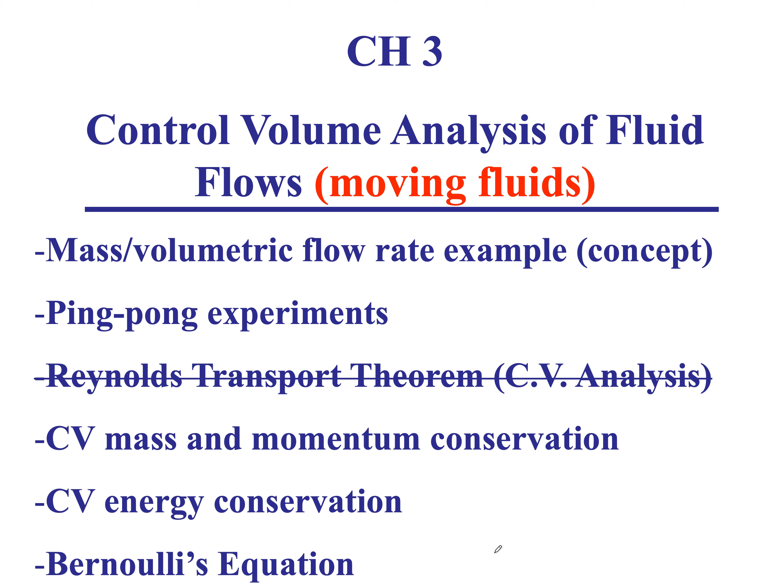For us to be able to understand these moving systems, we want now to consider their momentum conservation, their mass conservation, and their energy conservation. So these are the basic principles that we want to cover in this chapter number 3, which are the basic principles that we believe to be true, and there's sufficient evidence that these principles are true, which is the conservation of mass.

Mass is not destroyed nor created. Energy is not destroyed or created, but you can transform it from one form to another. And linear momentum conservation, that is, you need a force to change the direction or the velocity of an object of mass m, or force equals mass times acceleration.

The objective of this course: so we know all these principles, they aren't new to us, they're familiar principles, but what we will be doing over the coming lectures is to be able to mathematically express and write these 3 principles for a flowing system.

And for that, we will revert to the control volume concept that we have seen in thermodynamics, which defines a system as a set of inlets and outlets and some other boundaries. So a control volume is a system that has boundaries, and mass crosses those boundaries, and with the crossing of the boundaries, that mass carries with it momentum and energy, so energy crosses that boundary.

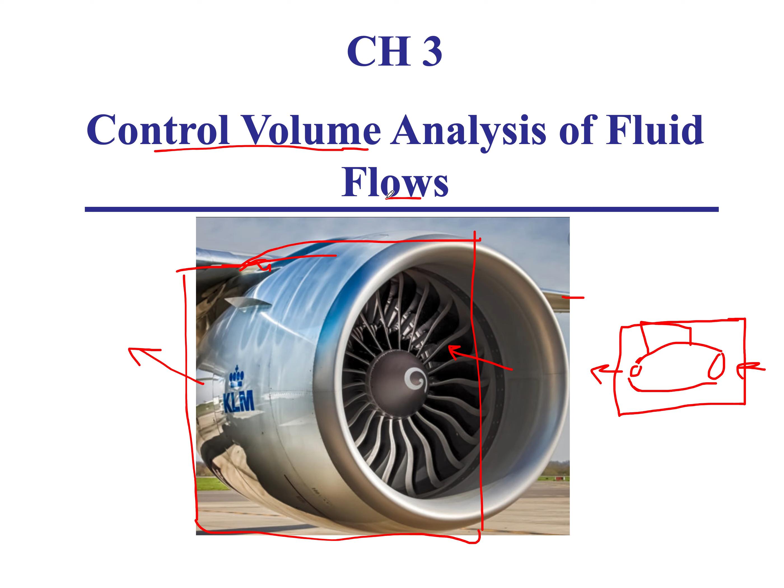And for that, I'm using this YouTube video. The reason why I picked this video is that they use an advanced flow visualization technique called Schlieren visualization, which lets you see small, minute variations in the density of the air using a set of lenses and lighting and mirrors.

So let's watch this. So this is the field of view which a Schlieren system sees. So when I play this, you will see that the natural air... Oops.

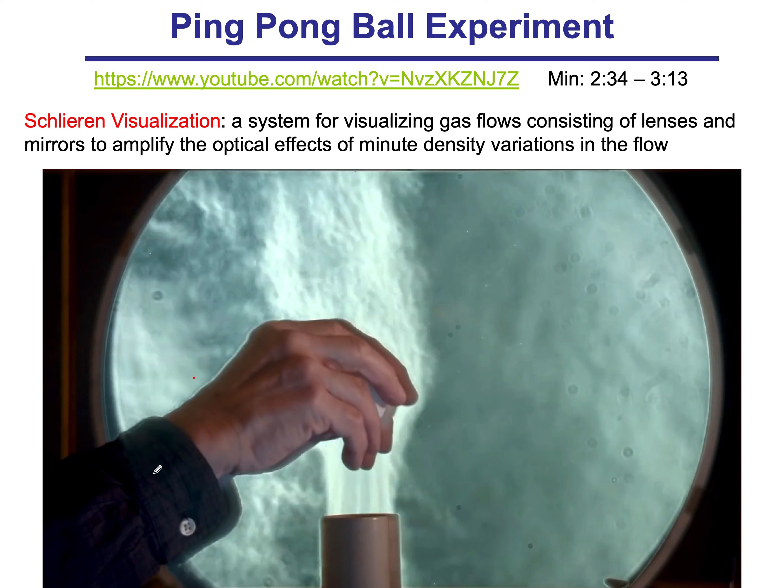Okay, never mind. Let's watch this video. So you have a ping pong ball suspended in an airstream. And you can do this actually at home, and we can see the white stuff is the variations in the density of the air due to its velocity. So we can tilt the hair dryer and the ping pong ball stays suspended, and so on and so forth.

Okay, so what we saw is the Schlieren effect allows us to see the variations in density in the fluid through the light effect, through the index of refraction variation. And what we've just seen was a hairdryer that ejects a stream of air, and a ping pong ball got suspended. So what we can conclude from this picture, what we can observe in this picture, is that there was an airstream.

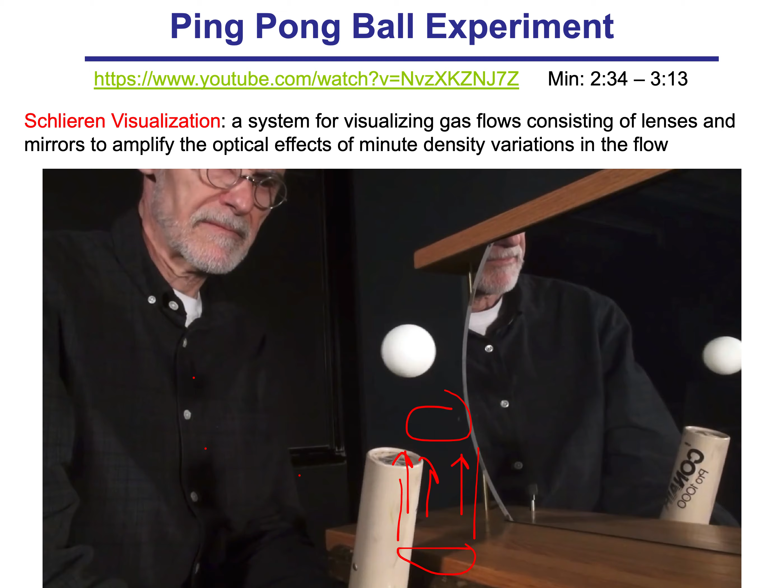So there was an airstream, and that airstream had a velocity. And that velocity was able to create a force. And how did we observe that force? By seeing that this ping pong ball is being suspended in the airstream. We're looking at the same thing except in two different lightings. That's what you would see with your eye before, and here's what you would see under a Schlieren system visualization. So we're seeing the airstream. That's what's nice about this experiment.

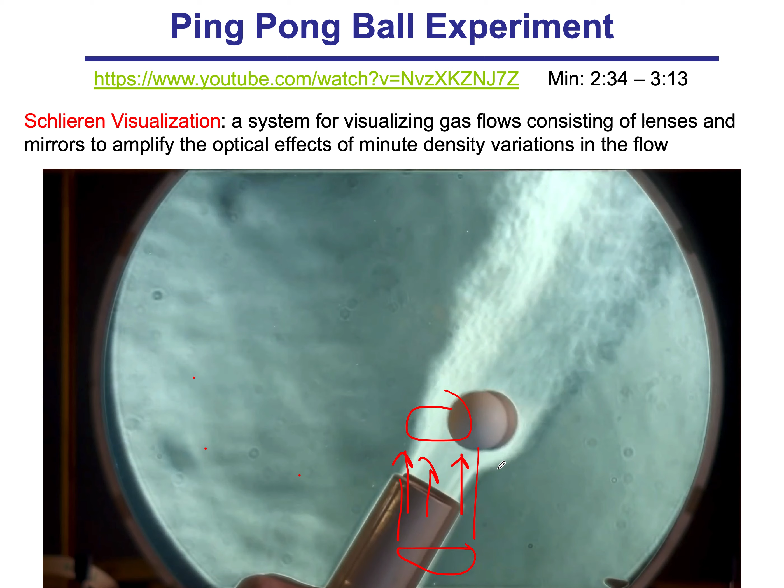So if you look at two snapshots of the demonstration that we have just shown a minute ago, you'll see the case where the ball is vertically suspended, but also you could see the case where the airstream is tilted. And let's see what we can notice over here.

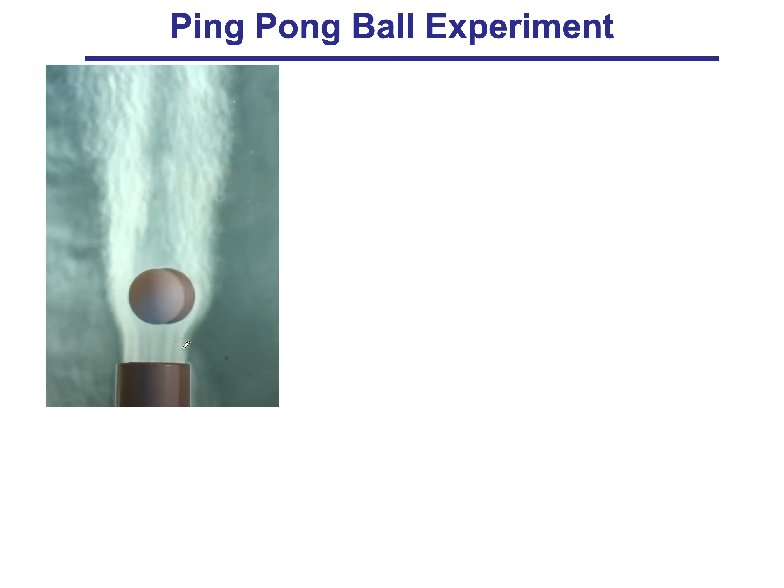The first thing that we can notice in the case of a vertically suspended ball, the airstream is going vertical, is that if I were to draw a control volume over here around the ball, you will see that the width of the airstream at the inlet is actually less than what it is at the outlet. So that's our first observation. We see that the air deflects around the ball, which we'd expect because the ball takes space, so we need space for the ball and the airstream at the same time.

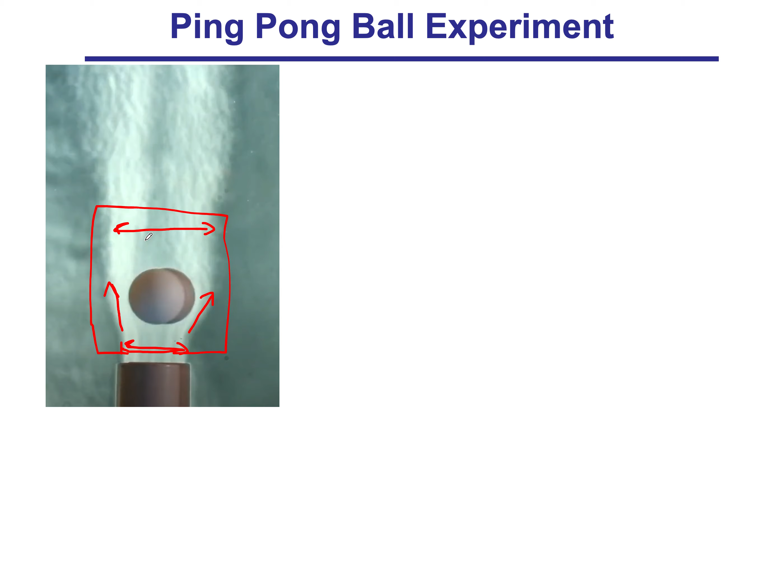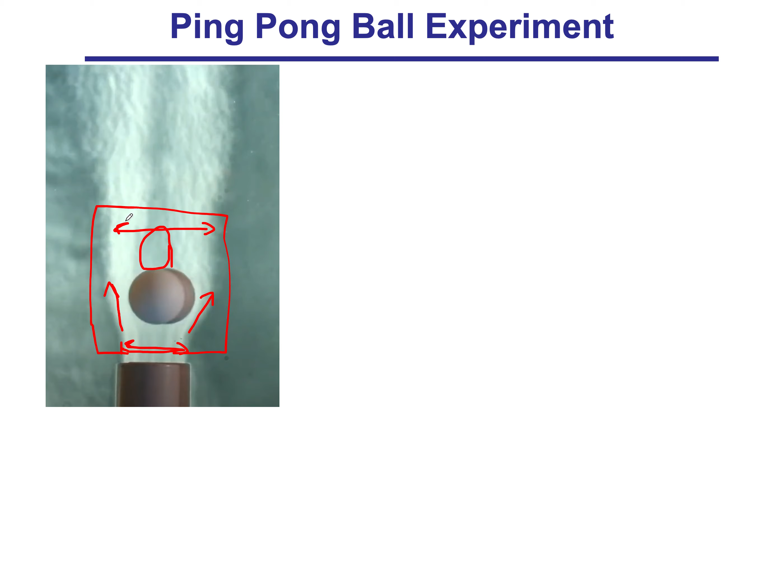And what you'd see here, you want to think of the bright light to be faster fluid, and the darker, shadowier region right here to be slower fluid. What you'd notice is that there is sort of symmetric flow left and right of the ball. But the important thing to notice also is that the width of the airstream that comes into the control volume is actually smaller than what leaves, and this has implications on the force generated on the ball.

So these are the type of things we will be considering in our study: when we take control volumes, it will help us understand what is happening in the flow field. So now we're mentioning a flow field, so let's come to that in a second. And what are the forces generated in that flow field? So now we came up with the word flow field, which means that we have a field of airflow, and there is at each point x, y, and z.

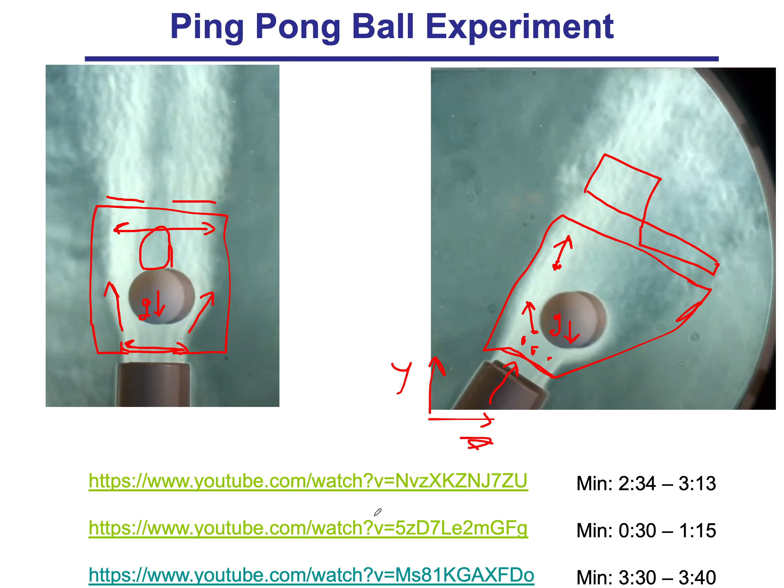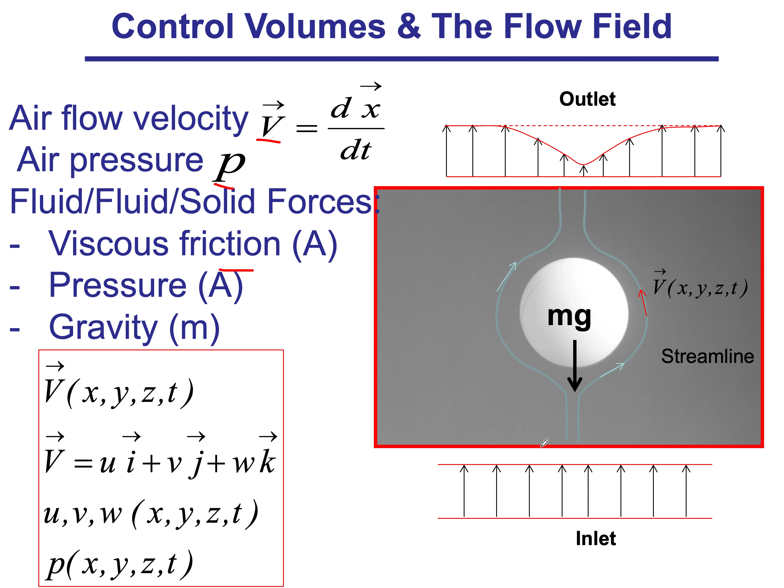And when I do that, the type of analysis that I will do is going to be completely different than the previous example, where I picked my control volume to be far, not to touch the ball, and to be sufficiently far away from the solid object here. But now that I have the control volume hugging the surface of the ball, my analysis is going to be

completely different, because if I look at what forces are acting on the surface of the ball, one is definitely going to be pressure, but at the same time we're going to have friction, which is parallel. So I'm going to get a shear stress and a normal stress, which I'm going to call pressure, and here I have a shear. And the pressure around the ball is going to be different depending on its angular position, as well as the shear stress.

But the net of that, if I integrate over the whole surface of the ball, I'm going to get the force due to the shear stress, and the force due to the pressure field. Now that we are talking about this particular control volume, I want to use it as an entry point to introduce the no-slip condition.

If I look at any fluid particle that's touching the surface of the ball and try to measure its velocity, I'm going to notice that it's 0. This has been shown through empirical experiments. There's a lot of empirical evidence showing that a fluid particle directly in touch with a solid object, such as the surface of this ping pong ball, is going to have 0 velocity. And that's what we call the no-slip condition.

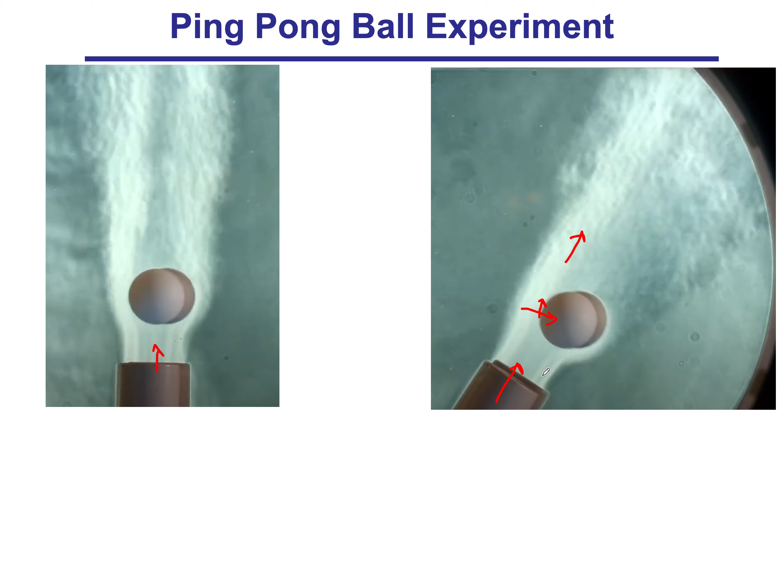So the reason we need to do control volume analysis is that it helps us answer questions like this. And control volume analysis, as we said, is a black box analysis. All I need to know is what's happening at the boundaries, and that will tell me a lot about what's happening inside the control volume. So all I need to know is what's happening at the outlet here and at the inlet.

And this is what's happening at the inlet. You have a very fast flow, concentrated and thin, and here you have a slow flow and a slightly faster flow in this region. We will come to this later on. But as we said, a force is generated because the air has momentum. It has lost some of its momentum to the ball, and it's left with less momentum.

But that air also has a mass, and this is continual. It's not the same air that comes in; every moment I have a fresh mass of air that comes in and leaves. So that is the first order of analysis: I want to know how much of that air is coming into the boundary of my control volume.

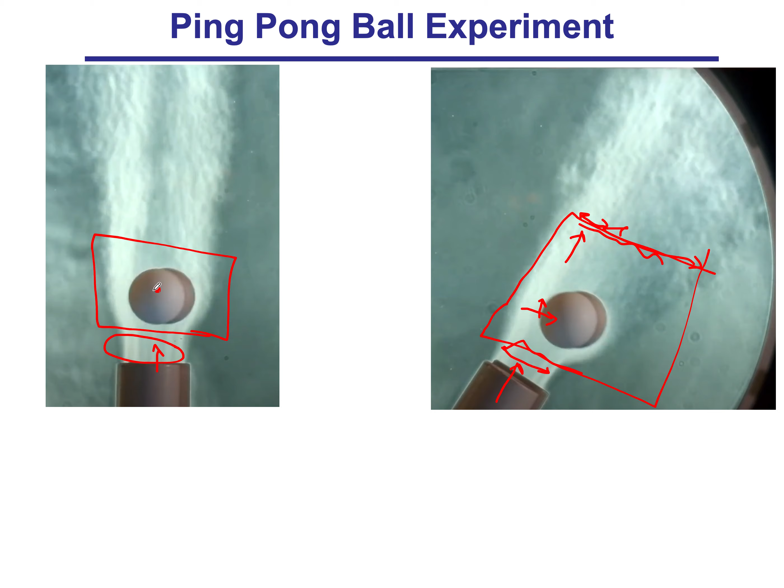If I'm able to quantify that, then I could move on to more complex analyses, such as what is the maximum weight of the ball that I can suspend in this jet stream. So our first order of business is to try and understand how much mass is being carried, is entering my control volume right over here.

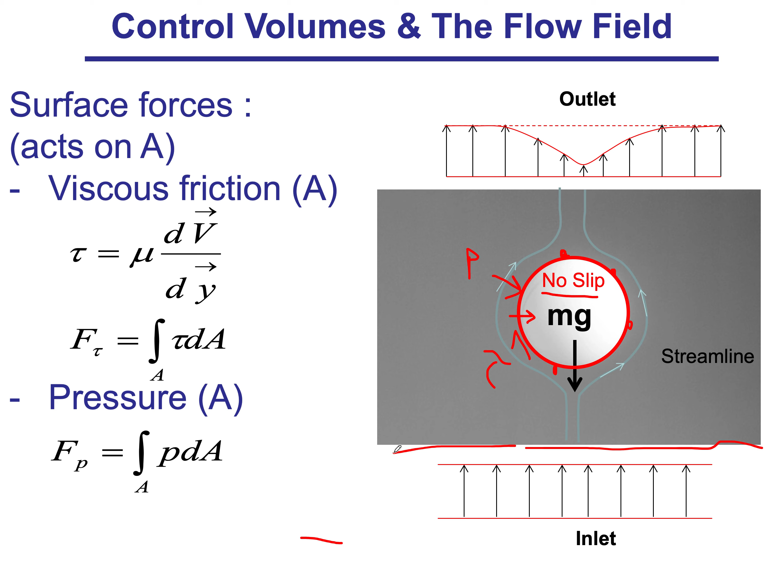So for that, let's go to the beach, and let's do a simple experiment on the beach, which is to scoop sand. So you're on the beach, you have a cup or you have a shovel, and you're scooping sand from the beach into the bucket. And the question is, can you fill the bucket in 1 minute? Are you going to fill the bucket in 1 minute or in 10 minutes? It depends on how fast you scoop and how much mass flow rate goes from the beach sand into the bucket.

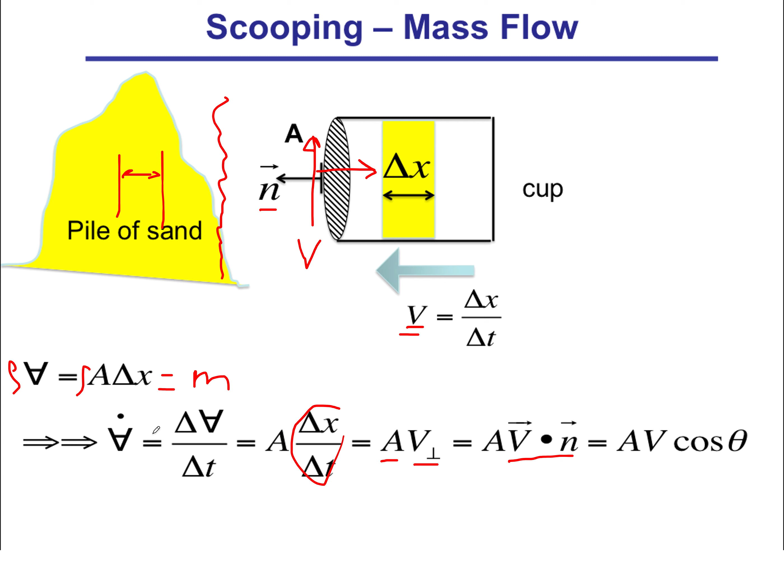So that is our volumetric flow rate. But now imagine I want to get mass. Mass is just the density times volume, so that gives me a mass. And if I want a mass flow rate, I just divide by time. So it's the same story, and all you need to do is just multiply by the density. Multiply the volumetric flow rate by density, you get the mass flow rate, and this would be the relationship we'll be using in this course for the mass flow rate.

Now let's look at other cases. Imagine now other theoretical cases. Imagine now that the pile of sand is going towards you at a velocity v, and you're also scooping in the direction of the pile of sand at the velocity v. The rate at which sand gets into your cup is actually 2v.

So this is the case where if you have a river and you have a flow in the river of velocity v, and you have a cup, if you let it just sit there, it will fill at a rate of velocity v. That's how much mass flow rate is going to get into your cup. But imagine now that you're scooping your cup at a velocity v upwards, or some other velocity, then it's the relative velocity between them. And since they're in opposite directions, that will sum up.

Now, the last point I want to make over here is that this cup is just to help our imagination. But now imagine the whole story without the cup. All you care about is this area. So really, you'll see in this formula right over here, there is no cup. There is only a cross-sectional area where fluxes go through, and we have the normal velocity of that cross-sectional area.

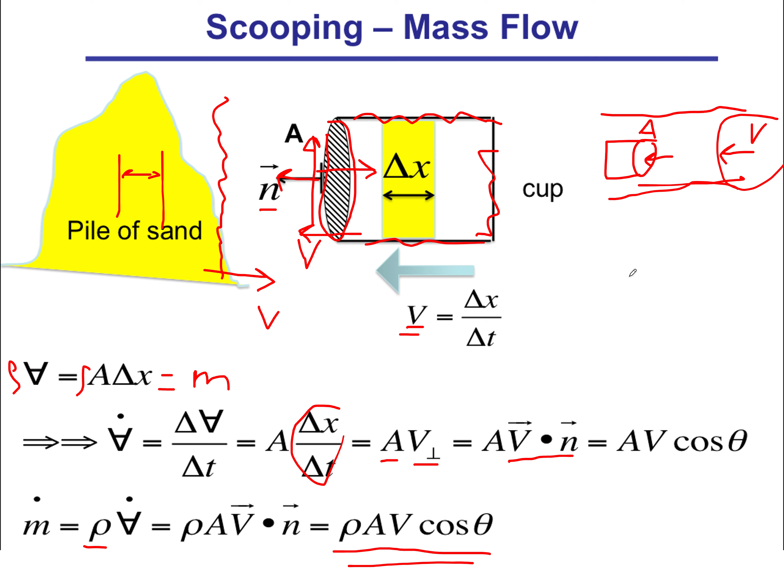So now relative velocity. The next thing we went into is when the fluid itself is moving, so the pile of sand is moving or the river is moving, and my area A, which is part of my boundary, is itself moving. Then I get what's called the relative velocity. And relative velocity is actually very important. The relative velocity is just the difference in velocity between the fluid and the boundary, the boundary represented by the area A.

So we still have the dot product, and now we just want to make sure it's the relative velocity between the two. And the relative velocity is the vectorial velocity. This comes into manifestation in aerodynamics quite a bit. For instance, if you fly from Paris to New York, heading west, it's actually going to take you longer than to fly east, such as from New York to Paris. The reason is because the air in which the airplane is suspended has a direction of motion. We will explain this a little bit more in the coming slides.

But I want to point you to this link over here, or you can just Google it. British Airways set a record crossing of the Atlantic in less than 5 hours. That was on February 9, 2020. They keep breaking these records. And the reason is they had a tailwind. So let's talk about that in a second.

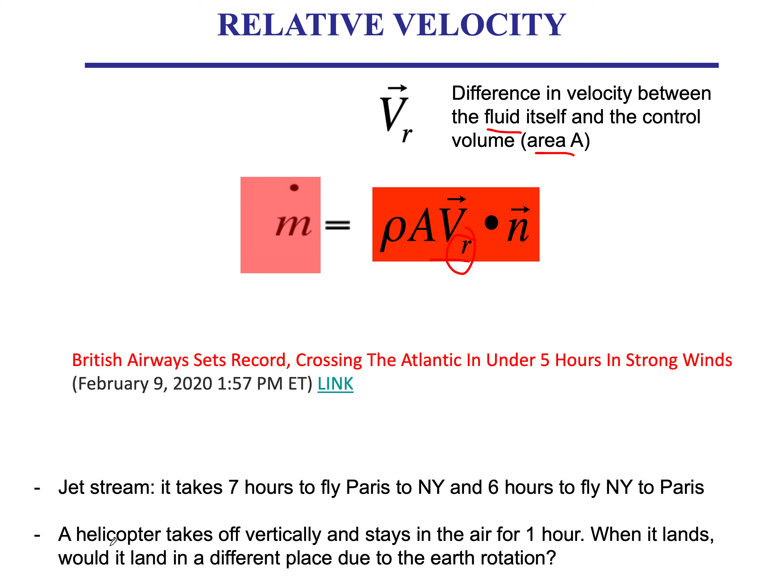Okay, so let's look at the relative wind speed. Remember we had the scooping with a cup from the river. The river had a velocity, the cup had a velocity, and then we had the third velocity, the difference between them, which we call the relative velocity. So for an airplane flying from point A to point B, the velocity of the airplane, which you can consider as our cup, we're going to call the ground velocity, which is what you measure with GPS speed. If you're sitting on an airplane and you look at the monitor, that's the ground velocity you get there.

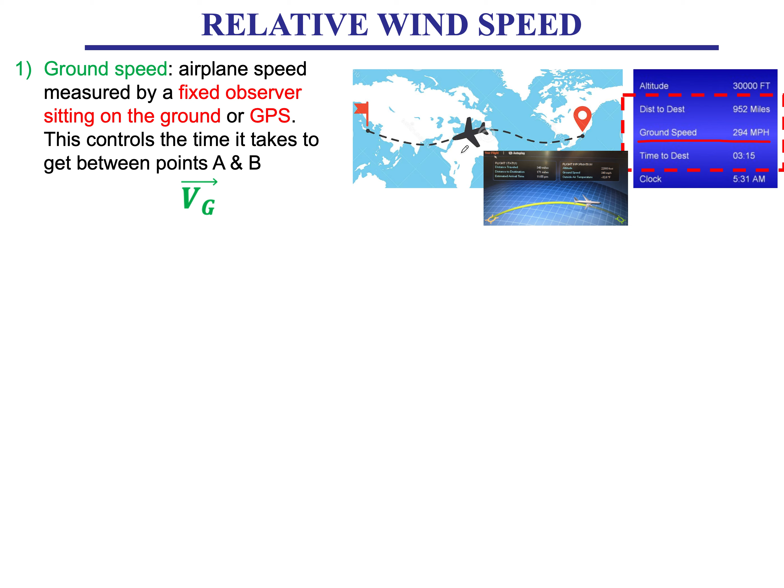It is the velocity observed: the velocity of the airplane, or the control volume, or that particular area we're interested in, the area of the engine, seen by a fixed observer on the ground. But let's say that same observer on the ground looks at the clouds around the airplane. They will notice that the clouds are also moving at a velocity. They could be moving in the same direction as the airplane, in the opposite direction, or in any other direction.

So that's the atmospheric wind speed. Let's call it VA, and that's typically measured by a ground weather station. And now, if I am sitting on the airplane, the engine and the other instruments on the airplane, such as the speed sensor, they don't care about the ground speed only, or the atmospheric wind speed only. They care about the relative velocity, because that's the velocity responsible for the mass flow rate going into the engines of the airplane.

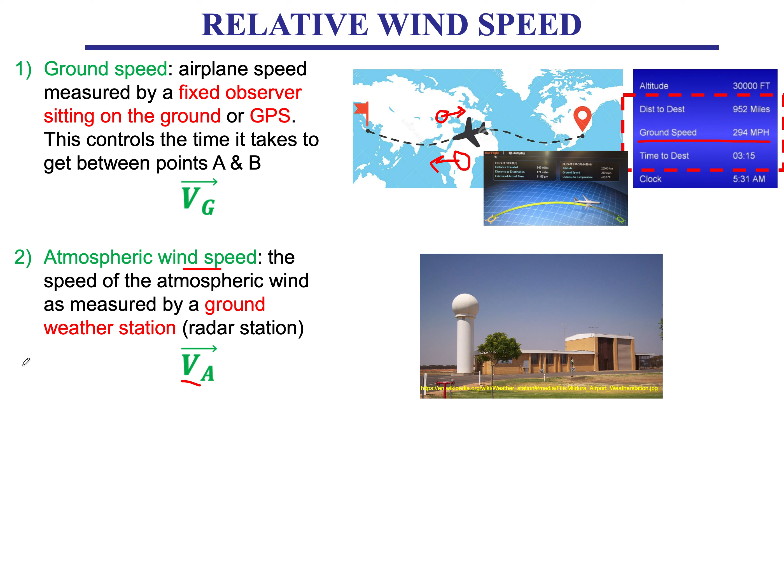So that, as well as the mass flow rate flowing over the wings, is what controls the amount of force that the wing generates. So it's an important velocity that we have to clarify a little bit more. So that's the relative velocity between the air and the airplane. And the relative velocity is the velocity of the wind seen by someone sitting on the airplane.

And really the way you measure this is you actually have someone or something sit on the airplane and measure the air velocity. So you have what's called the pitot tube, a velocity measurement device that measures the difference between VG and VA, which is the relative velocity, and directly gives it to you. And it looks like this. It's something that sticks out of the body of the aircraft and measures this relative velocity.

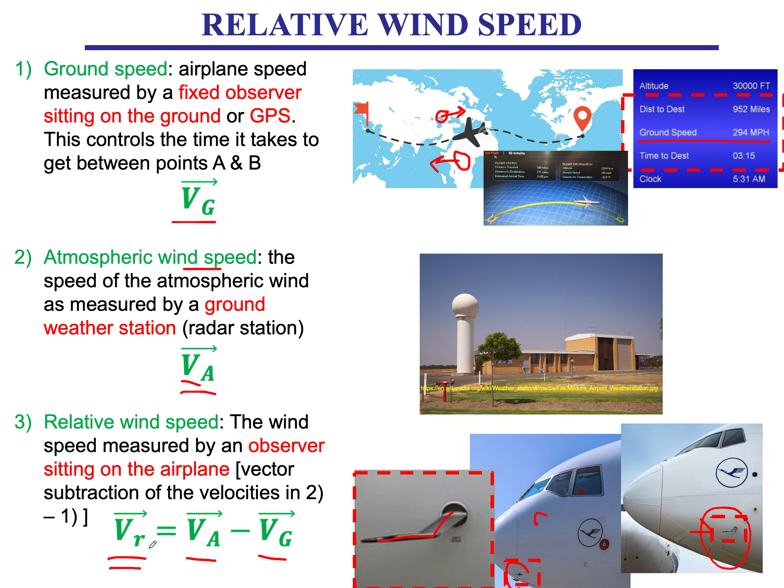And this is the relative velocity that we have seen before, that's responsible for the mass flow rate. And that mass flow rate, as it flows over the airplane, carries with it momentum and carries with it energy. So all the energetics, all the momentum conservation calculations will have to depend on this relative velocity.

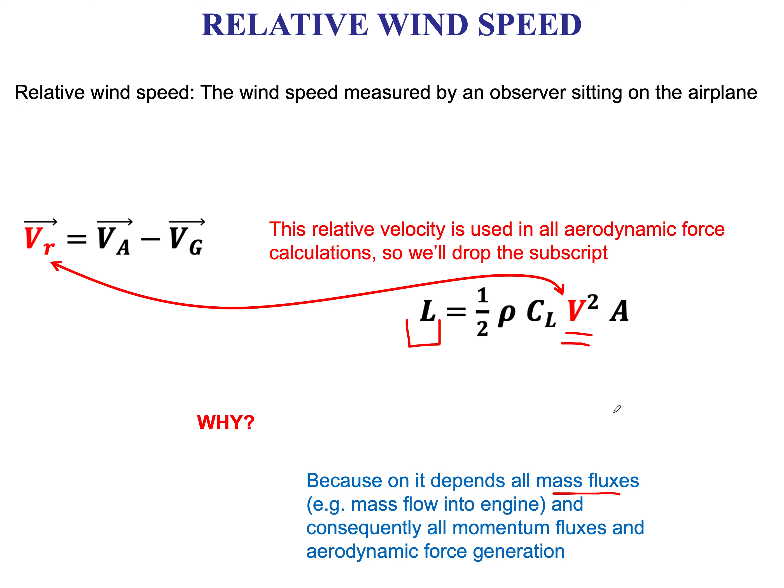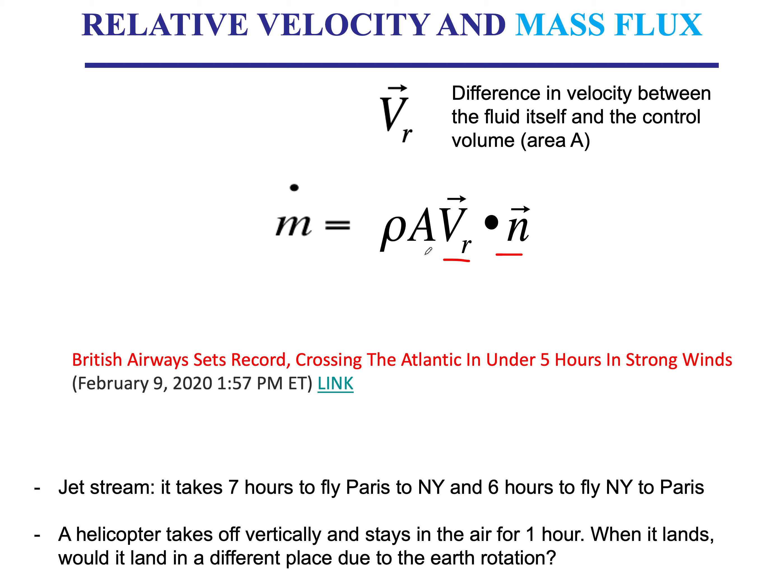Very well. And this is a slide from my aerodynamics course. So the relative velocity is what you actually use in all your aerodynamic calculations, such as the lift calculation and drag and so on. Again, it's because of the mass fluxes; the mass flow rate depends on the relative velocity, as in the previous slide, v relative dot n dA. And also the forces will depend on that. We'll come to this slide later on to explain what it is.

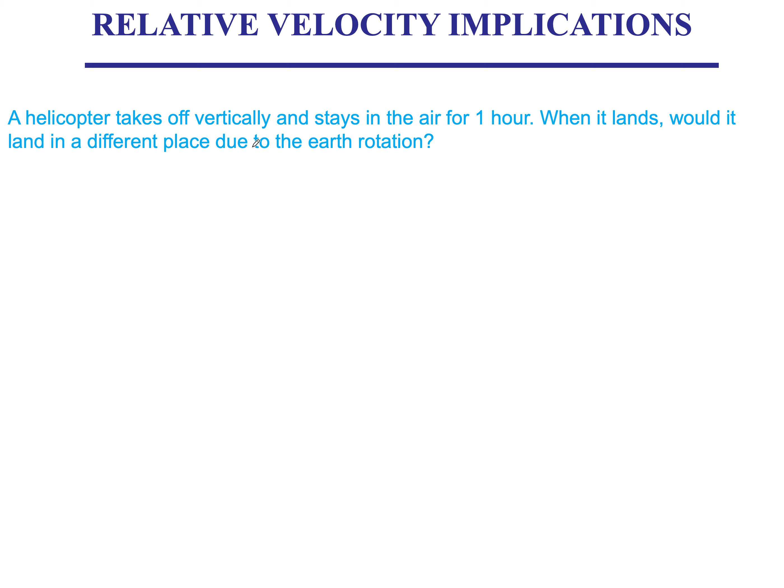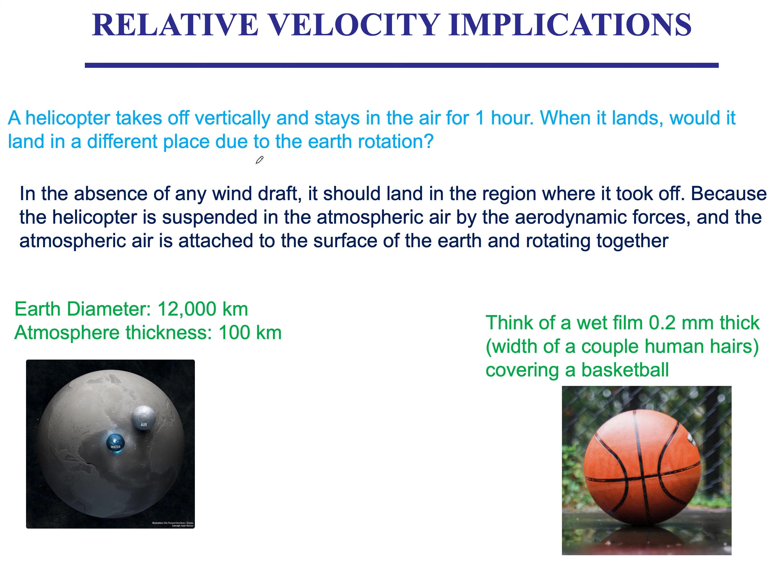So let's look at the relative velocity in a more practical fashion and application. So if you look at the monitor, you can see, right. So I think this answers the question: when you ride up in a helicopter and you stay an hour suspended in the air, are you going to land in the same place or in a different place? So I'll let you think about that, and I'm gonna skip over this.

So we're still talking about the relative velocity, and you're sitting on an airplane, and you'll see that there's the ground speed, which is the speed of the airplane seen by an observer sitting on the ground, which is the same as what the GPS system does. If you have a GPS system when you're riding on an airplane, you're going to get the same speed, what's called the ground speed. But also on the monitor you have what's called tailwind. Sometimes it says tailwind, sometimes it says headwind.

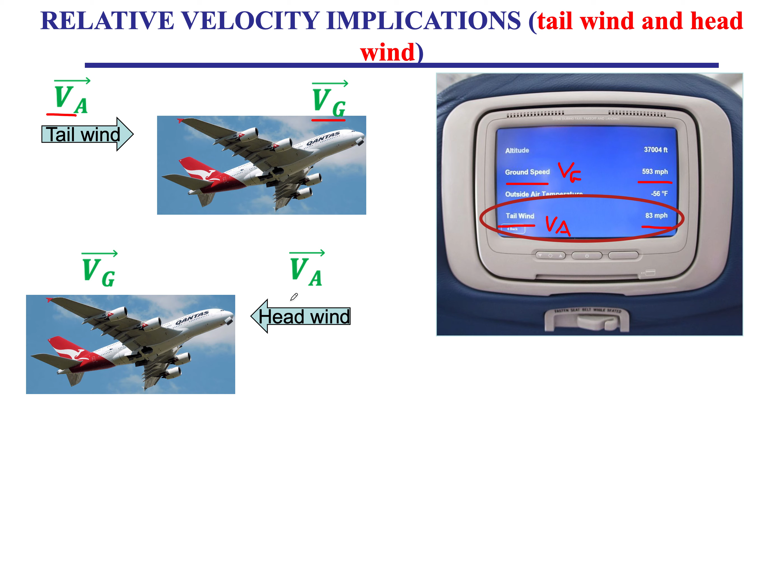So this is the VG, which we have seen two slides ago, and this is the VA as measured by a weather station, and the relative velocity is the difference between those two. So let's look at those two cases, a tailwind and a headwind. So here's my VG, the ground velocity, and this is the atmospheric air. If you're moving in the same direction, then they subtract. But if you have headwind, the relative velocity would be the summation of the magnitudes of the VG and VA.

So that's the reason why you get a difference in time and ground speed flying east or flying west. The reason is because you have a jet stream. So if you're heading towards the east, you're riding on this jet stream and you don't have to work as hard. But if you're heading west, you have to move relative to the ground, but also overcome the jet stream velocity.

But why? You may ask why. Well, let's take it from the point of view of the engine. So let's say the engine has to produce a certain amount of thrust force, and that thrust force depends on the mass flow rate that goes through the engine.

And the mass flow rate that goes through the engine just depends on the density, the relative velocity, and the opening area of the engine. So with the area and the density being constant, the relative velocity is what I care about. And let's say my engine needs to run at a certain mass flow rate, which means it needs to run at a certain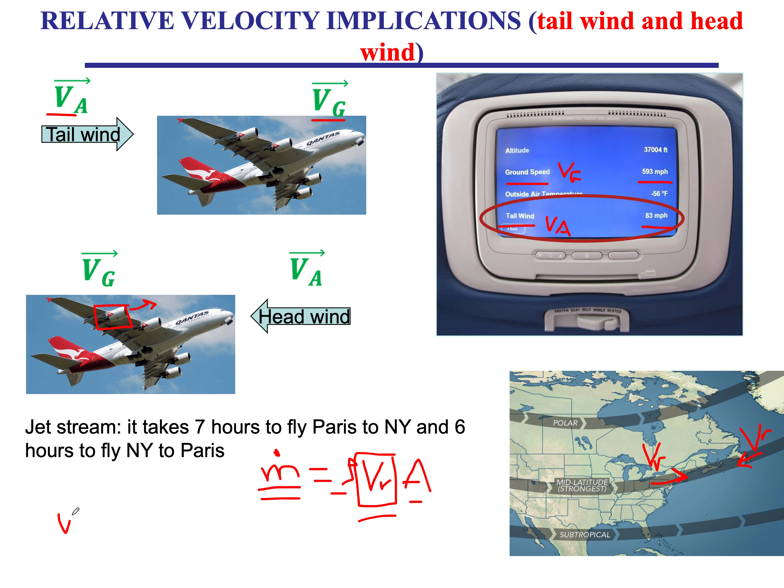certain V relative that is the same whether you're heading east or west. Let's say 500 kilometers per hour, whether you're heading east or whether you're heading west. Same V relative. And now you can see that V relative can be written as VA minus VG. So if I'm only looking at VG, my ground velocity will be VA minus VR.

So since V relative is the same, it has to be the same because it's set by the engines and by the wings and by the aerodynamics, whether heading east or heading west. It must be then my ground velocity that varies, because VG will be VA minus V relative. So since VA is variable and V relative is constant, my ground velocity is going to vary.

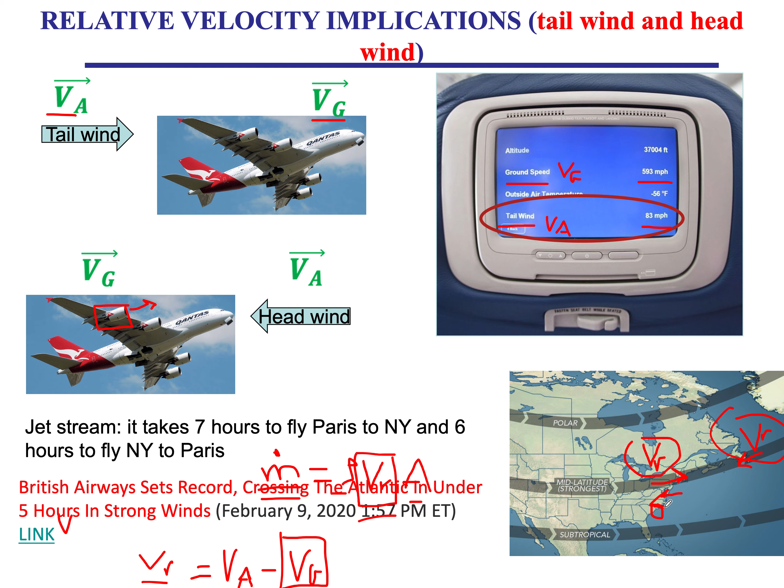Which means an observer sitting on the ground, when the airplane is heading east, will see that the airplane is going at 800 kilometers per hour, while when the same airplane is moving west, it's only moving at maybe 700 or 600 kilometers per hour. So let's take this example into more detail.

First, let's look at the implications of landing in headwind and landing in tailwind. So here's landing in headwind, and you can watch the YouTube video over here. Look at the ground velocity of the aircraft when it lands. Then we will watch another video of the ground velocity when we're landing in tailwind. So pay attention, once the aircraft lands, to its velocity on the runway. It's landing in headwind.

You notice that the airplane lands with a very small ground speed, and it only takes a short part of the runway to come to a complete stop, just because it's in headwind. Okay, so here we have landing in a tailwind. You see the airplane on the runway is still going full speed. Its ground speed is very high.

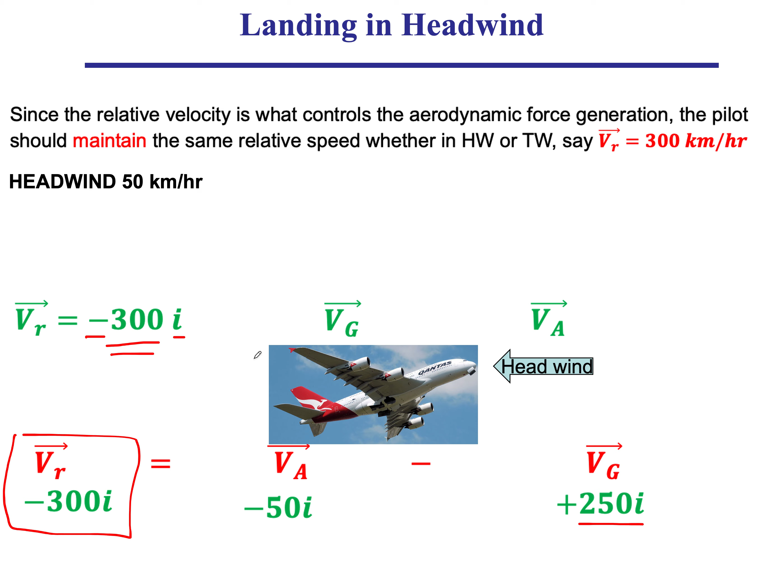So let's say 300. But now I'm landing in tailwind, in a wind that is going to the right. That's why it's in the positive x direction at 50. So what do you need for VG to get a minus 300? This has to be a plus 350. So the ground speed in the headwind case was 250, while in the tailwind it was 350. That's a significant difference, which is twice the atmospheric wind speed if it's the same in the two cases.

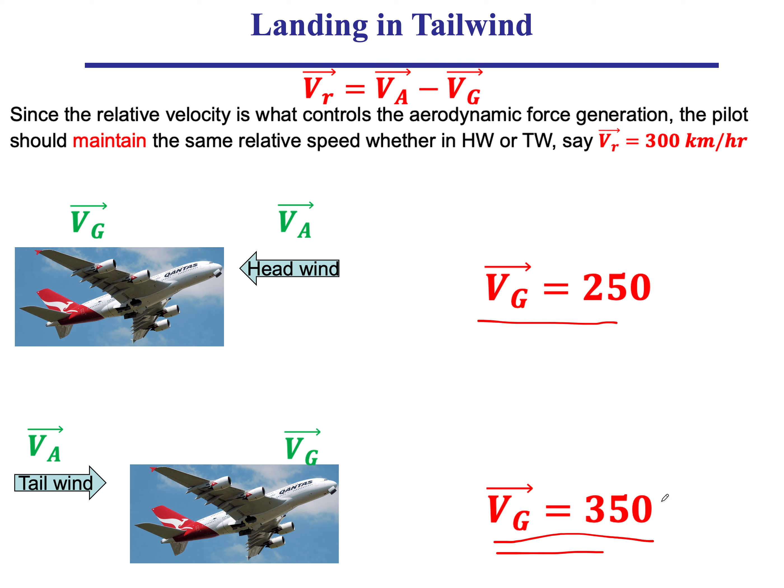And that explains why you require much more of the runway to come to a complete stop in the videos that we've seen than when you're landing in headwind. However, the landing part is the harder part, but when you're flying, you really would like this more. You'd like a tailwind more because it's helping you, it's pushing you, it's giving you this free 50 kilometer per hour without having to pay for it with fuel or anything.

Okay, so that is the relative velocity, and these are some manifestations of the relative velocity of the scooping example we have done, whether you're scooping from a pile of sand on the beach or you're scooping from a moving river. So now that we are familiar with the relative velocity, we're going to be analyzing systems, some of which can be moving. For instance, the nozzle on a garden hose, we would like to be able to analyze that. And for that, I may pick a control volume that is fixed in space.

But in the case of an airplane, if I want to use a control volume analysis to do mass balance, force balance and energy balance to look at energy expenditures as well as lift and drag forces, then I want my control volume to be moving at the same speed as the airplane itself, or in this case as the ship itself. So this is the second type of control volume, a control volume that moves at a constant speed. Here you had a fixed non-moving control volume, but in both cases the control volume doesn't deform. It's a rectangle, and remains a rectangle throughout the whole problem.

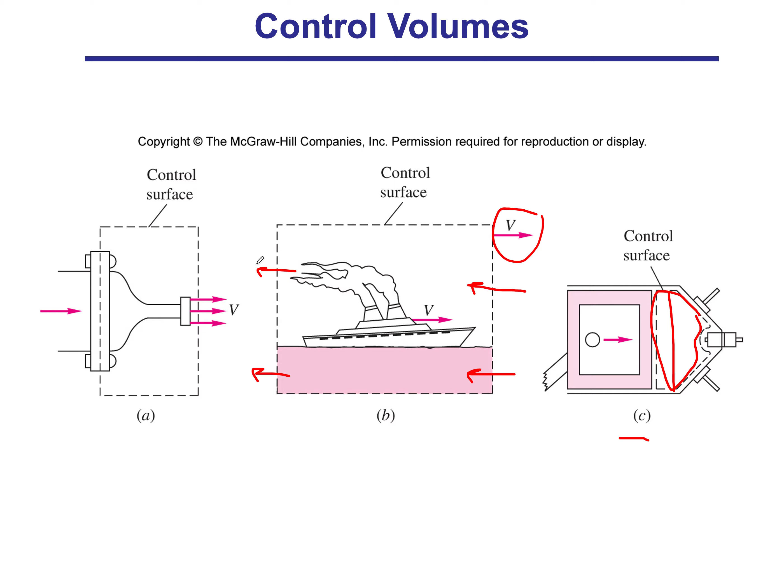And for that, here you have air going through your control volume, and in this case you have water, seawater in the case of the ship. It comes in and then leaves from the other side. And if you try to follow a particle, it becomes a little too complex. So from a dynamics point of view, that's where we need a theory to help us look at this time-lapse movie of stuff coming in and stuff leaving, and try to look at it in a fixed sense. And that's what the Reynolds transport theorem helps us do when we have flux terms going into and leaving our system. We're not going to cover it.

You can read it in the book, and we're just going to jump right into the results to describe our energetics, the mass conservation principle, as well as Newton's second law. So you can look at the Reynolds transport theorem in the book, and we're going to skip through it without loss of continuity. So the first principle we're going to look at and how to write is the conservation of mass for a control volume.